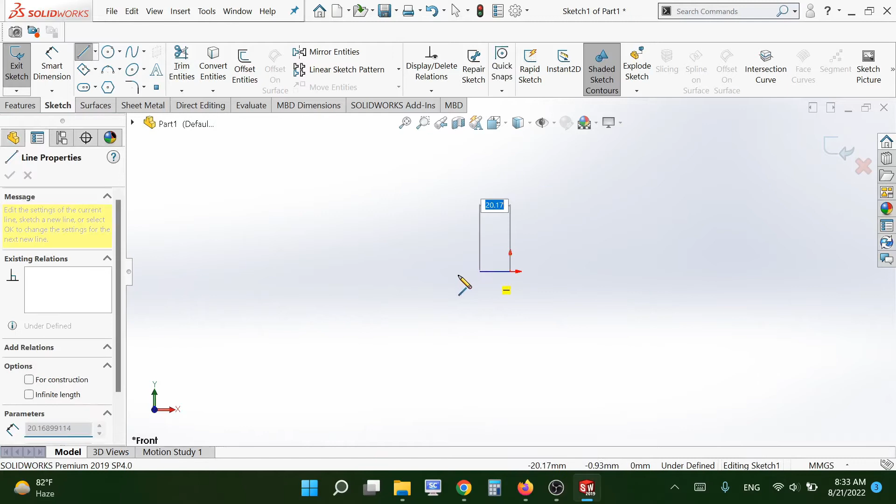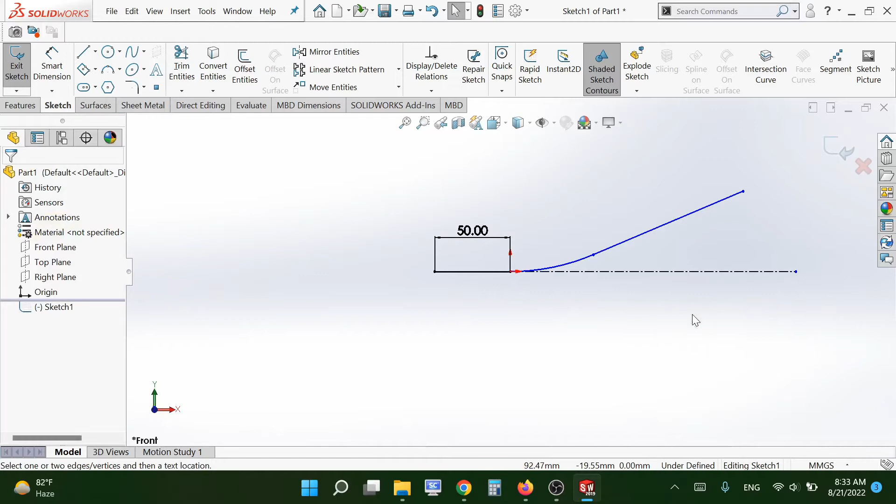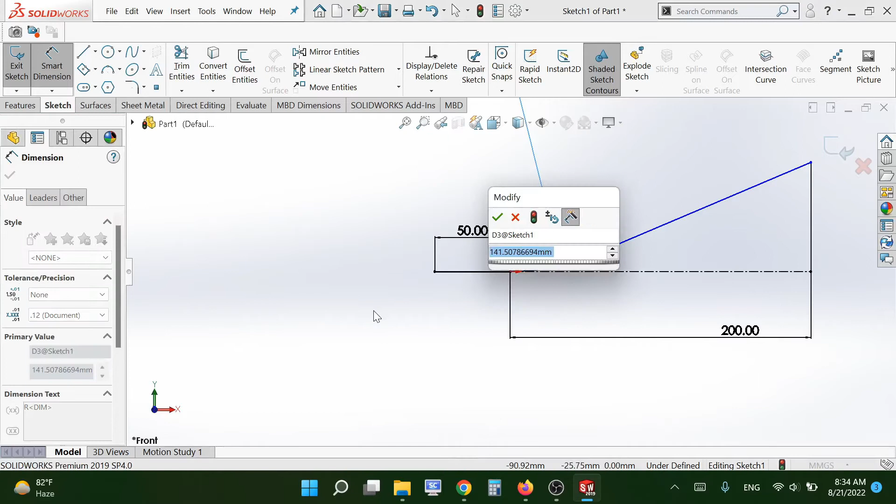Here are two lines and one arc. All these are tangent to one another. Draw a center line and dimension this whole sketch on the front plane. With the help of dimensions and relations, this sketch is completed.

Exit the sketch and then click on extrude surface to create a surface that looks like the front plane of the fork. Click OK and then click on the top plane.

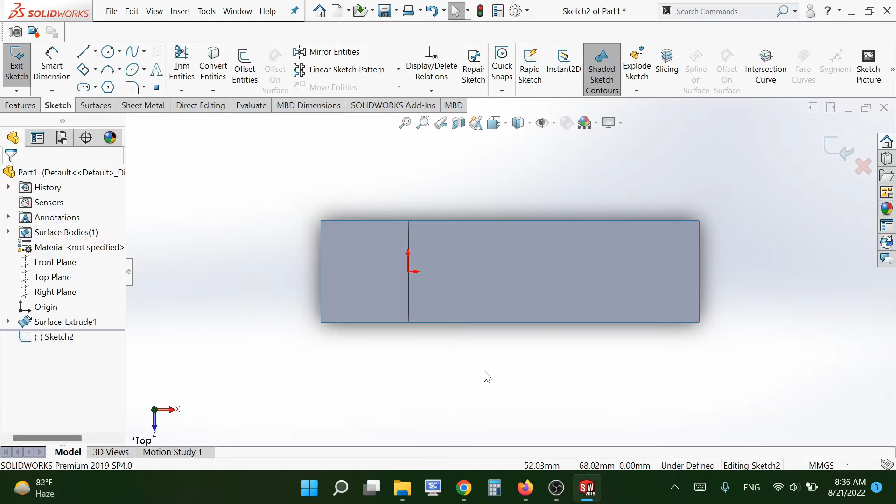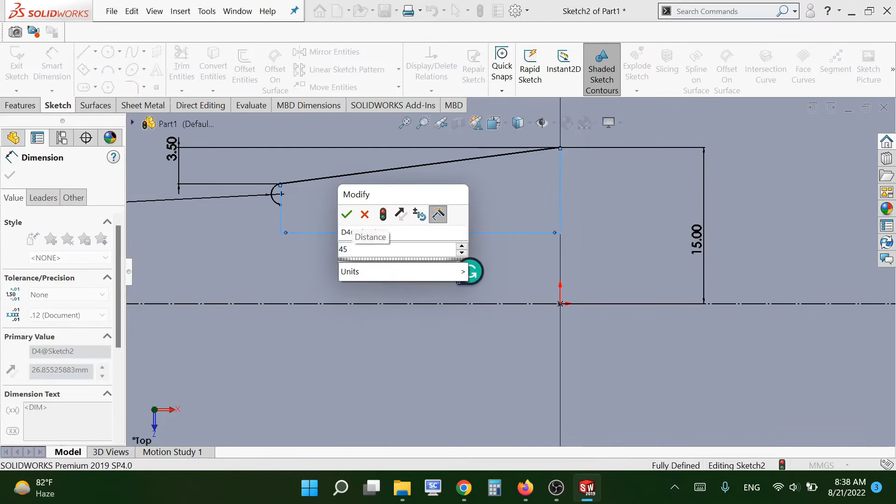Create the top plane sketch according to dimensions. Now the top plane sketch is created. Exit the sketch. Then click on the split line command in the surface tab.

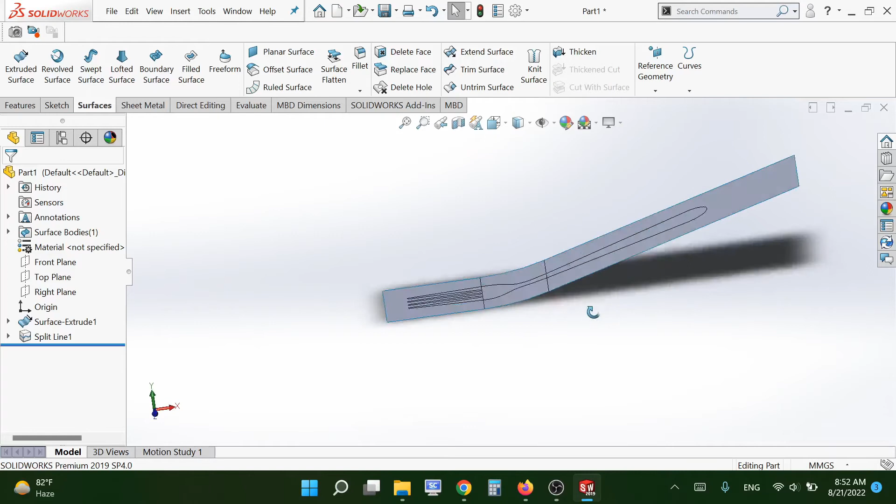Select the sketch and then the faces and click OK. Choose projection. Now the sketch is projected on the already existing surface. There are extra faces. Go to the surface tab and click on delete face.

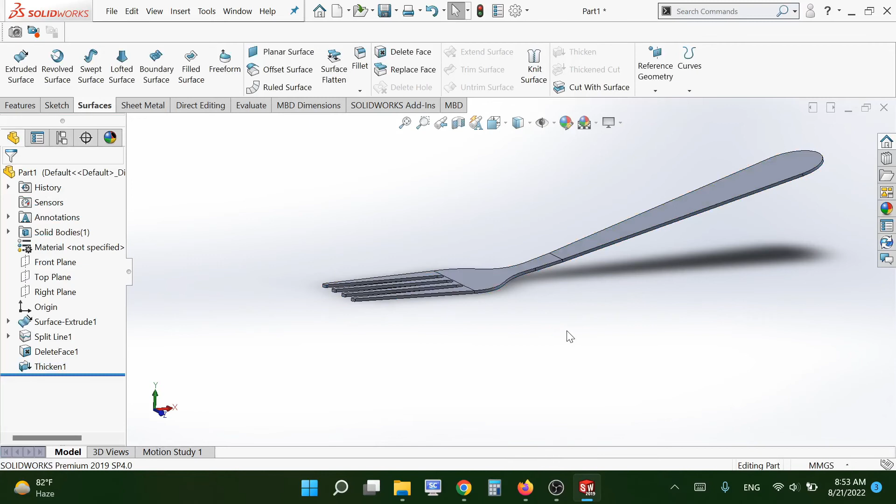Select all extra faces and click OK. Now the surface like a fork is ready. Click on thicken and give it 1 mm thickness, then

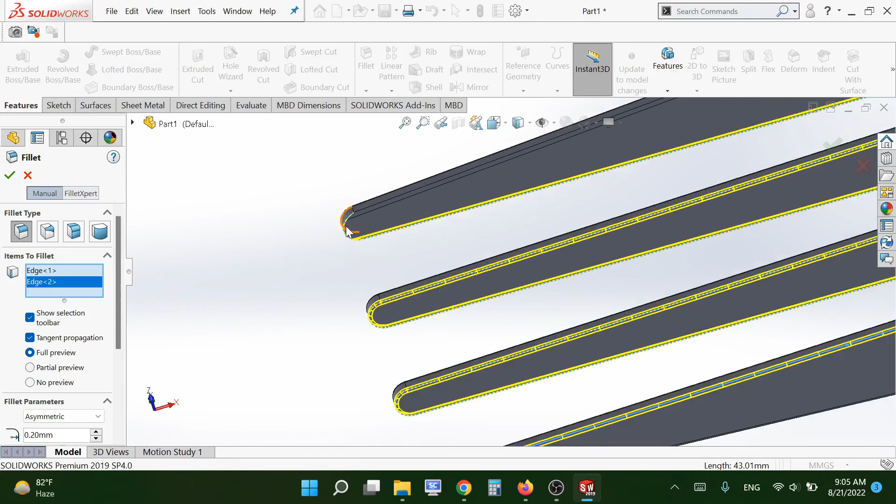click on fillet and give an appropriate fillet to this model. Now click on appearance and give any appearance to the fork. The model is ready. Apply any scene so that it looks good.